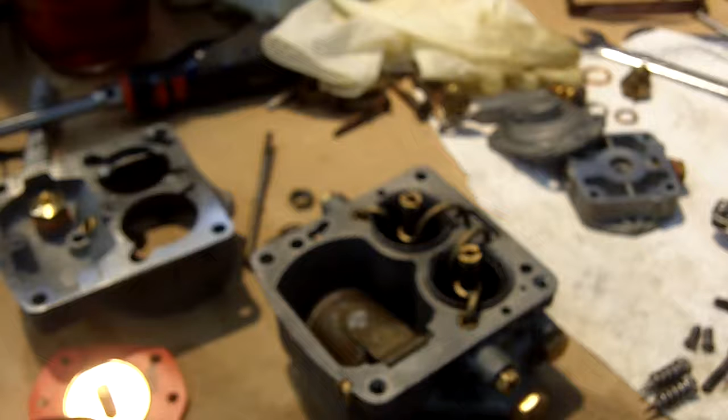Hello David, this is your 220 carburetor that I've taken apart, and I'll let you know what I found.

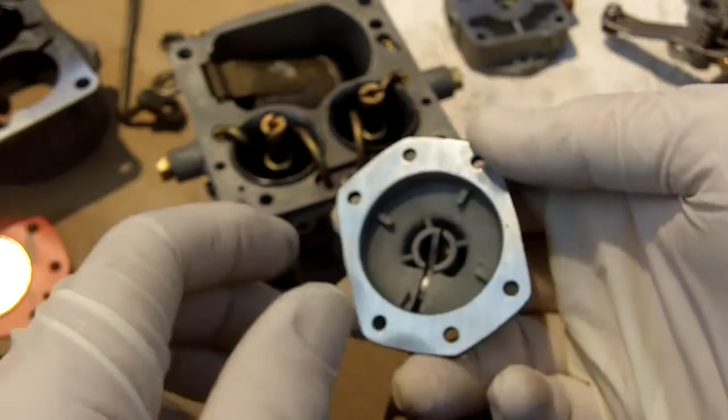Primarily, my co-worker and I believe the leakage was actually coming from this, here, not on camera, okay, it was coming from the accelerator pump diaphragm. Because this lower right screw is not really tight all the way, and this cover was not anywhere close to flat. This cover is right above the engine. It gets pretty warm and is made out of pot metal, and it starts to tweak a little bit, flex.

So what I've done is, you might be able to see how shiny it is. Well, all these have been dressed down to where they're just as smooth as glass, and hopefully the leakage will be eliminated. I've also, on this check valve right here, put a screen on here for you that wasn't there, and that helps catch grit before it goes into the accelerator pump discharge nozzles, which are right here.

If you ever have any trouble with it idling, this is the idle jet, G50 idle jet, and this has a very teeny hole on the end of it, and that easily gets clogged with grit. So I always recommend you have an extra fuel filter in place, in line with this carburetor.

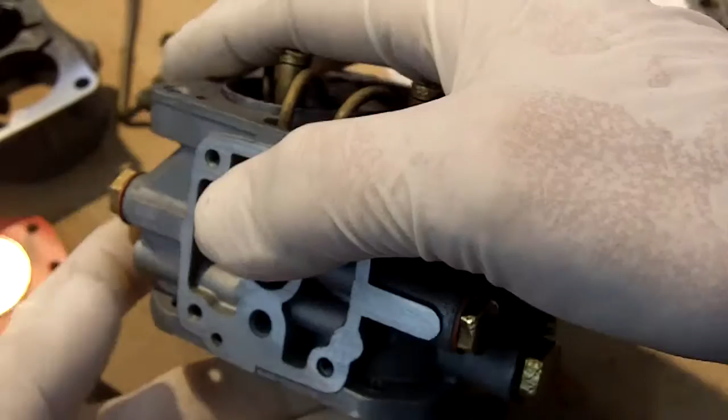This part has been dressed down as well, so it's optically and just laser flat. Same with this surface here, and this is the surface that you were saying is where it was leaking from. But as I say, these two just fit right together without a gasket, and you can see the gasket that was in there was nicely done, but it was indeed a homemade gasket, and that's because no gasket goes there. I'm waiting for a new gasket to come in from Mercedes.

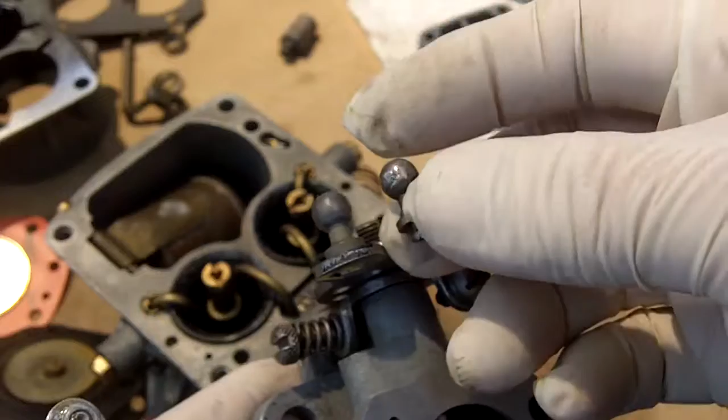What else? Also, this mounting surface here, you can see, is now dressed down flat. This was not as critical as up here. I also got in here and polished up the choke plunger. Another thing I did was install a new ball for your throttle linkage. This one here is almost worn out to the point where I can't imagine it was even going to operate. So you got a new ball here, and I'm going to also send you a new socket to snap in place.

What else? Adjusting the idle mixture. This is the idle mixture screw, and this screw goes in, and you snug it down, and then you back it off and get your initial adjustment. Ordinarily what you do, you screw it down, and you don't even have to use a screwdriver, except it's tough to get your fingers in there sometimes, but you screw it down until it stops. You don't jam it down there and tighten it as hard as you can, because that doesn't accomplish anything except ruin the hole inside here. All you want to do is get to a starting point, and then you back it out.

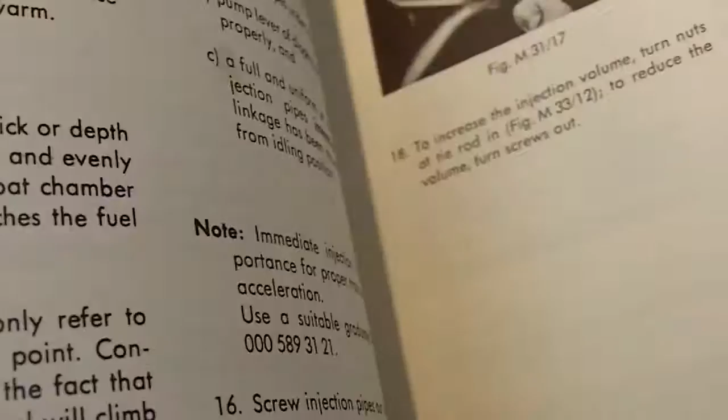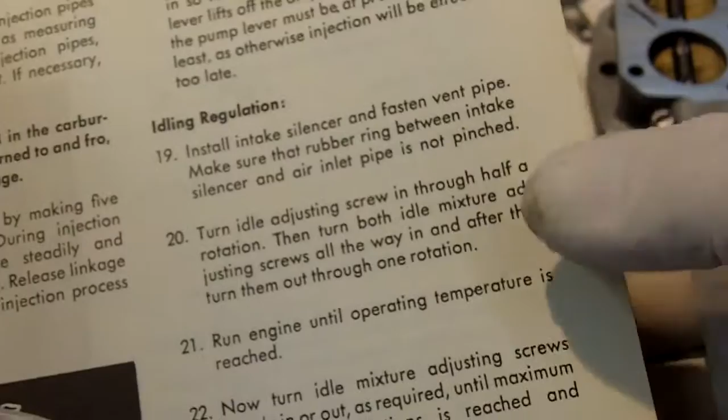According to the factory book, you back it out one turn. Yours was backed out 2.5 turns, I believe. If that's where your car is going to run, well, that's fine, go ahead and run it at that point. But according to the workshop manual, okay, rereading here, number 20, idling regulation. Turn idle adjusting screw in through half a rotation. I don't know what that means. Anyway, you bottom them out.

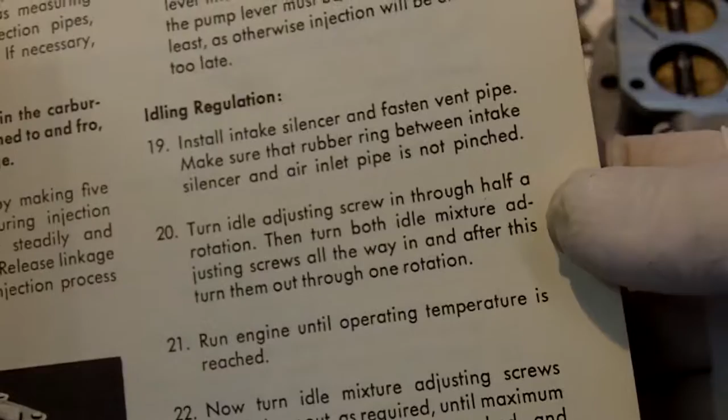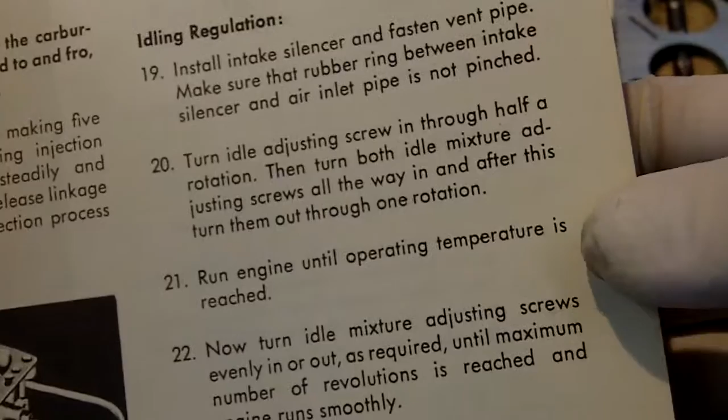Then turn both idle mixture adjusting screws all the way in, which is what I just said, and after this, turn them out one rotation. Run engine until operating temperature is reached. Now turn idle mixture adjusting screws evenly in or out as required until maximum number of revolutions is reached and engine runs smoothly. That's all you do to adjust the carburetors on this engine.

So I'll set them to one turn out, and then you're just going to adjust these things in and out with the engine idling and warmed up until you get the best idle out of the engine. And you're just going to do it slowly.

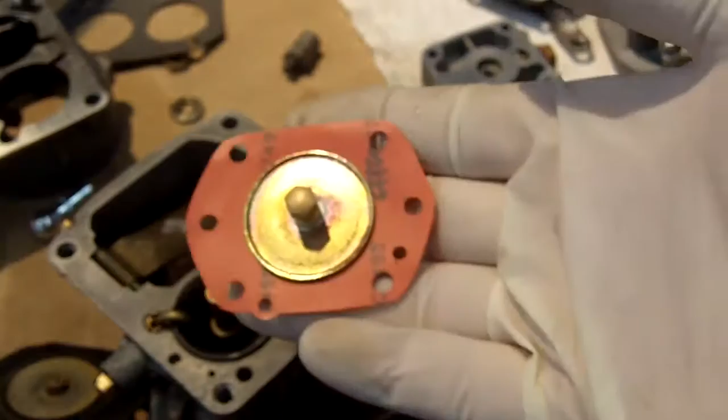Another thing that I found that I did not like was this accelerator pump adjusting rod was screwed in really far. It's not supposed to be screwed down that far, so I'm going to have to find out what's going on with that. But I think I'm going to install new factory accelerator pump diaphragms instead of the black ones, and I think they'll maybe help things a little bit. But anyway, this was adjusted way too far down for our purposes.

The float bowl cover has been dressed down as well. You can see how nice and pretty it is. Not much you can do there. These guys right here, where's my screwdriver? Okay. These are air corrector jets, and this jet screws into a post that goes down into this little part right here that sticks across the throat. And if this is stuck and you go wrenching on these things, that stand that's in there is pressed in place, and it can snap. So I tell people, as long as they pass air, don't screw around with them.

Alright, I'm trying to think of anything else. I guess you already knew one of these screw holes was stripped out, and so somebody put a bolt and a nut in there. But I'm going to leave that alone. No need to helicoil that. So that's it, and I'll assemble these things and get fluid in there. I use a combination of Marvel Mystery Oil and mineral oil, so I can see where the fluid is going and not going, and we'll see if anything leaks, and hopefully we'll get your carburetor taken care of.